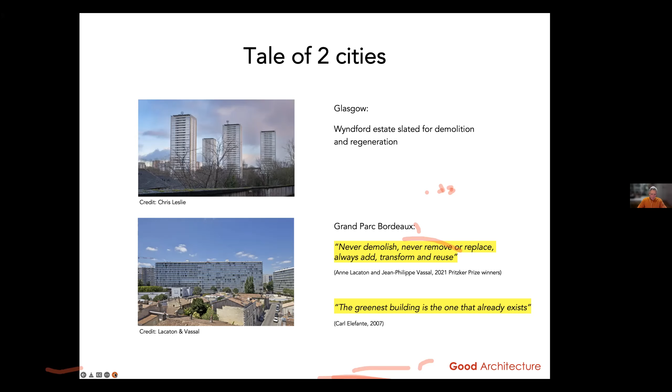It very well summarizes the need to do it because of the climate emergency, because of the need to improve the living conditions in millions of the homes in the UK, and the opportunity it would provide to increase employment, because we are lacking in the construction workforce to do this retrofitting work to our buildings, which in turn has a benefit to the wider economy.

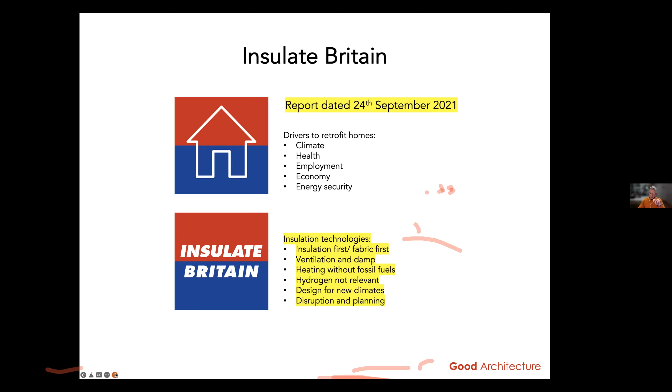Designing for new climates is about, with the changing climate, one of the things we'll be doing when we retrofit our homes is getting ready for a warmer climate and minimizing or reducing the risk of overheating. It also acknowledges that it can be a very messy process, so it does need to be planned.

Then there's the question lots of people ask: how far do you go? I'm a member of the Passivhaus Trust as a Passive House designer as well as an architect. They did a review last year, published just a couple of months ago, about the level to which retrofit should go, relating it to percentage reductions in energy use in buildings, and spelling out what they call a shallow retrofit and a deep retrofit.

These things all come about when we actually look at insulating buildings. It may or may not be at the forefront of our minds when we're doing this, but the more one can do, given the targets we're talking about, and the net zero carbon target by 2050, or 2030 as some would submit is appropriate, or 2025 if you go with Extinction Rebellion and Insulate Britain - these are all things that come about when one looks at insulating buildings.

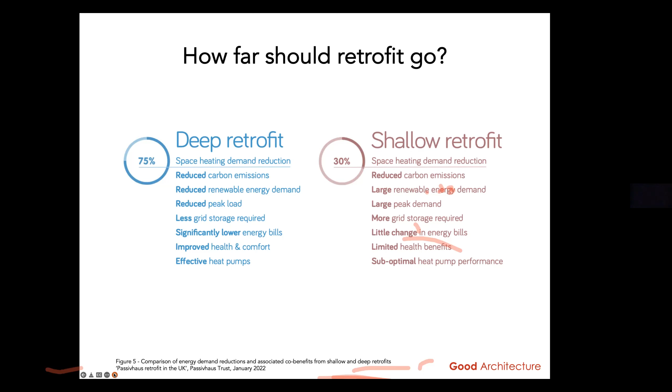The trust also related it to an assessment of how the existing housing stock performs, using the metric called space heating demand. This is measured in kilowatt hours per square meter per annum. It's a way of comparing buildings' performance like for like per square meter - this is the amount of energy used to provide space heating. The biggest bar is in the 130 kilowatt hours per square meter per annum range.

There's a big speculation that typical new build is around 85. And there are then on the left of this chart various standards that people have proposed: passive house new build, and EnerPHit, which is the passive house retrofit standard - you can do that two ways, by space heating demand or by using components performing at a certain standard.

Then there's AECB, an organisation called the Association of Environment Conscious Building, and LETI, the London Energy Transformation Initiative, that have also looked into retrofit guidance. So all in the range for retrofit between 25 and 50 kilowatt hours per square meter per annum - those are the kind of numbers.

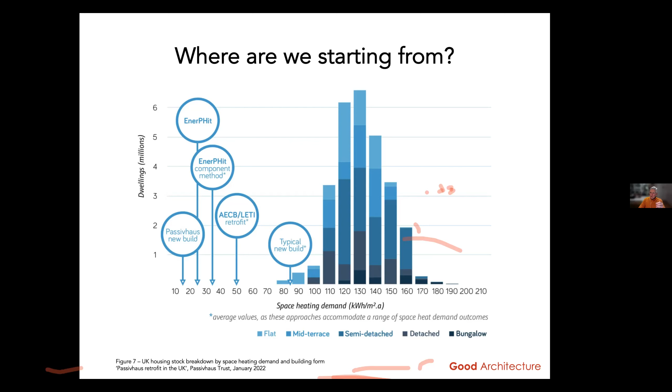Now, I think if at all possible, it's always very useful to gain an understanding of how your existing building is actually performing, in order to know how far you might be able to improve its performance.

Now, I came across this cartoon just the other day on Twitter. Apart from it being by Cluff and Innova Partners, I have no idea who this is or where it came from, so I can't attribute it. But it's about how we often go about missing the main point, which is what I'm talking about tonight. It is about heating.

It's not - batteries won't get us out of our problem. Hydrogen won't get us out of our problem. DAC is direct air capture, which I think is carbon capture, which isn't really going to help us. We can't solar panel our way out of the problem. We can't electric vehicle our way out of the problem. And all the time we've got these problems hanging over us about energy security and the actual climate goals and the changes happening to the climate, and how we want to try and arrest that change in the climate.

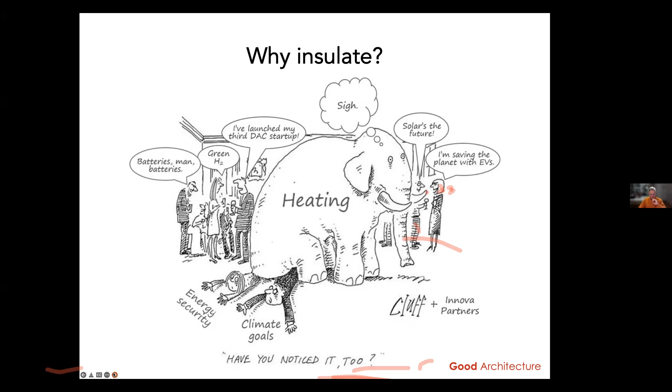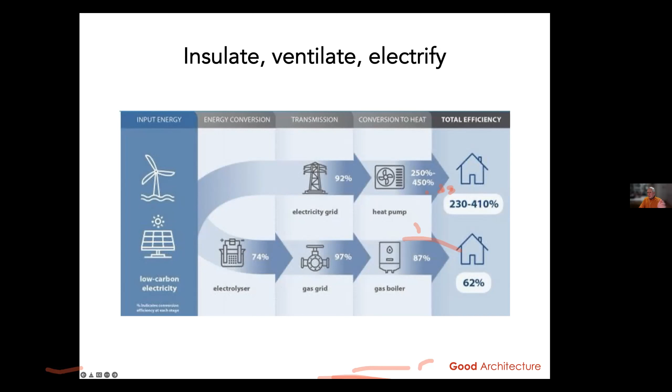That kind of goes with the insulation of properties, and is a logical consequence or follow-on from reducing our energy use through insulation.

Brand names we're unfortunately very familiar with at the moment if we've been following the Grenfell inquiry, Kingspan and Celotex. They are very commonly used in construction at the moment. The mineral wool or rock wool, our typical loft insulation roll mats, we're probably also very familiar with. Expanded polystyrene, extruded polystyrene - again you'll probably be able to get those quite easily through local builders merchants, almost just go and pick them up possibly.

But from there on, the wood fiber boards, cellulose, which can be new plant-based material or recycled newspaper material, sheep wool, and hemp, which is another plant fiber-based product. As we go on down, Diathonite is a very interesting thick plaster coat that one applies as internal wall insulation.

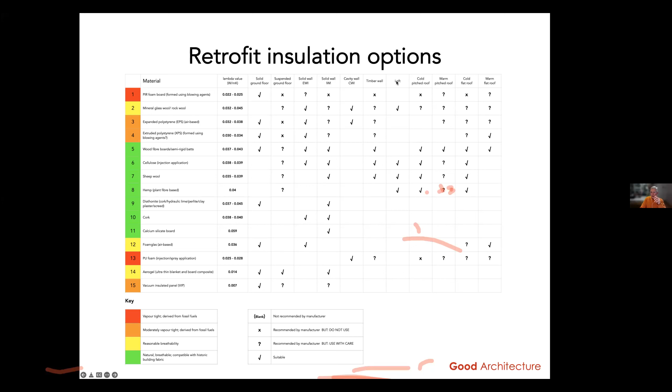Through rising damp, through leaking roofs and gutters and downwater pipes. You can get wind-driven rain coming from the outside and going through the fabric. You've got indoor activities where the moisture generated inside might want to go back out through the fabric. Interstitial condensation is where moisture going in either direction hits a dew point and condenses within the construction. And I think in summertime there's this solar-driven moisture, where there is a moisture gradient from outside to inside, in contrast to the more common winter heating season moisture gradient from inside to outside.

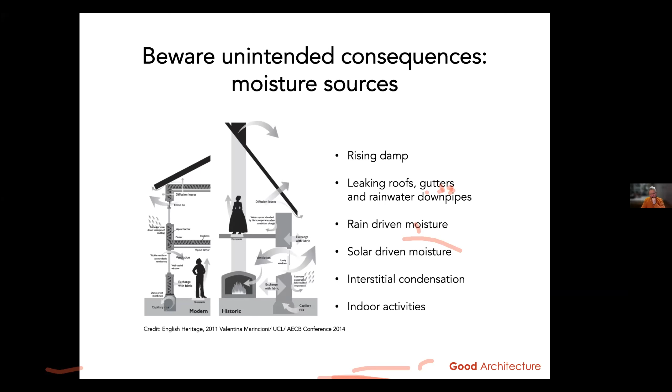I did wonder about putting up this phrase from Dr. Paul Baker, based in Glasgow I think, or the last I heard he was: it's not rocket science, it's harder. That could be a bit off-putting, but to me it's just another way of saying we have to be careful and think things through before we embark on this.

Another architect friend of mine has summarized it like this about how he would approach retrofitting any building. The first one, about getting all asbestos out, is something he's learned from bitter experience himself. And there's this general advice, number 2: carry out repairs before you retrofit. So if you have leaking roofs, cracks in the structure, whatever, you have to sort those out before you begin any sort of thermal upgrade. Otherwise, you could be accelerating the deterioration of the fabric, whereas a well put together, well insulated building will actually protect the structure.

The third point is to do as much as one can to understand how your house is performing before you start. A very simple way is just looking at your energy bills, and if you can, calculate your internal floor area. Convert your electricity into kilowatt hours, and your gas use, if you use gas, also in kilowatt hours. And you can work out this kilowatt hours per square meter per annum figure. It's quite a rough and ready way of working out where you're starting from.

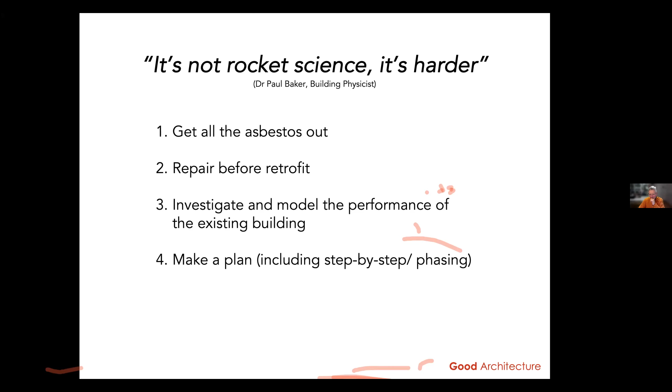And then, as I've been saying already, do make a plan. Sometimes, and quite commonly, it's a realistic way forward, but not everyone can do the whole retrofit to the whole building in one go. So think about how one might do it in a step-by-step process, or phasing things, for different houses and different family or occupant needs - there's no set pattern. But what you don't want to do is something and then have to undo it later to do the next phase. That's one reason you need to be thinking that through in advance.

Just one last slide, at the starting point, these two graphs here. Again, the Passivhaus Trust just wanted to check how the Passive House Planning Package tool, PHPP, which helps designers build Passive House design buildings from scratch, works for their retrofit standard called EnerPHit - that you can't model a typical existing building in it without adjusting it for how we tend to heat our buildings. I imagine most of us possibly have heating on for a spell in the morning and then of an evening, and a lot of people tend not to have it on in the day or overnight.

Whereas the whole premise of the low energy building, the Passive House, is that it's designed to be at a constant 20 degrees internally. But you need to make a sort of adjustment.

The Passivhaus Trust undertook this study, looking at it two ways. Figure 3 on the left looks at how the PHPP prediction, modified for periodic heating, compared to the national average space heating demand. They then checked one specific dwelling in more detail, where the owners gave them their electricity and gas consumption details. They were comfortable with the fit, but it fitted when the average typical internal temperature was around 17 degrees rather than 20 in a new build passive house.

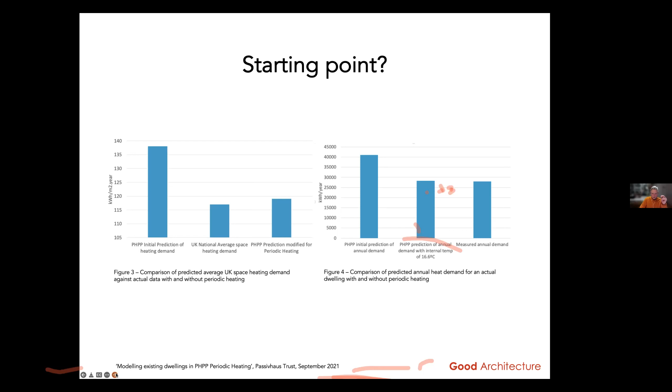There's another friend, Bob Prewett, who was part of the Retrofit for the Future program just over 10 years ago. He has a nice summary diagram that I wanted to use.

This house is a very typical Balham mid-terrace house. At the front, the frontage has been retained and tidied up and repointed, with internal wall insulation. The floor for the first half of the house is a suspended floor that's been insulated, but as is common with these back additions, it has a solid floor at the back, so they needed to look at that separately. At ceiling level under the front pitch roof there's loft insulation, but in the shallower pitched rear roof there's insulation between rafters with a secondary layer inserted. At the back, because it's out of public view, they've used external wall insulation.

This will be a very typical kind of situation we might find ourselves in. There isn't a single wall insulation approach, or necessarily a single floor or roof insulation approach, that needs to be applied to our houses, but several different approaches and materials best suited to each.

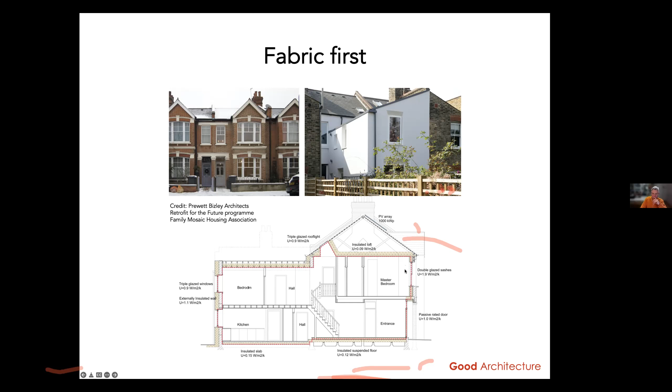So we're going to look first at a suspended timber floor, and the options just for that.

This house is in Scotland. I've been following this guy on Twitter, so that's how I know what he's doing, and he's recording what he's doing himself to the existing suspended timber floor in this house. This elevation on the right shows where he's ultimately aiming for, basically turning it from a 1.5 story dwelling into 2 stories.

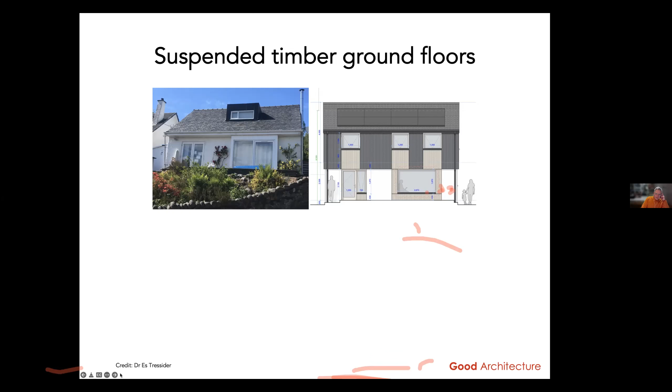I'd say he's a keen outdoor sports person, because that is actually the view from that window. He lives in Fort William, and that is Ben Nevis. He posts photographs every now and again where you just see grey murk, but that's a fantastic view. So I can understand why he's keen to live there and improve this particular property.

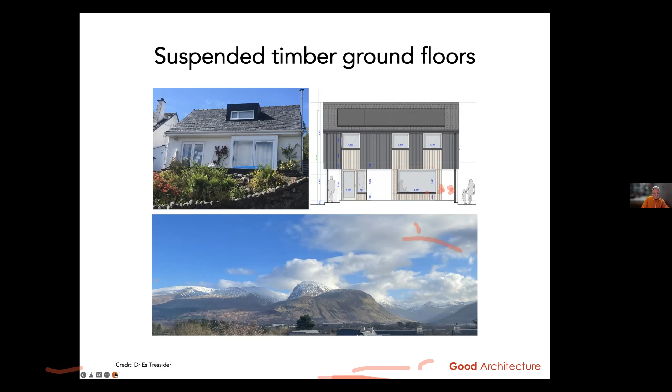Working through these photos, you can see the top left shows the existing timber floor joists, which look in pretty good condition. What he's done quite crudely is add plywood to the sides to create a deeper void, under which he lays this membrane, while still allowing a ventilated airspace underneath to retain insulation and protect it from moving air underneath, which reduces its effectiveness.

These three other photographs at the top show from slightly different angles how the membrane goes in. It is time-consuming, fiddly work, but he's aiming to create 280 millimeters, nearly a foot, of floor insulation. Because it's contained within timber materials, he's using cellulose insulation in its fluffy form that you can just pour in from the bags, and fill the cavity.

A little bit of tamping, but not too much, before laying over this membrane, which is part of his air tightness strategy. It's an air barrier that will ultimately link with whatever he's going to do to his walls and around the rest of the envelope, including the new structure at first floor level.

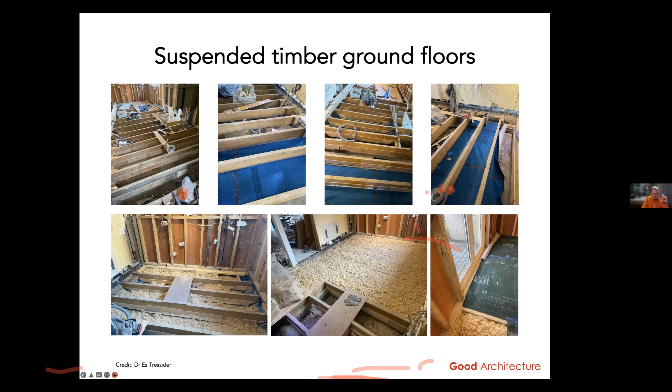But what happens when you're faced with something like this, which is a project of mine a few years ago? The corner of the building here, you can see a brick plinth, so you've got a thicker section of brickwork, and then conventional 9-inch brickwork, a solid brick wall.

When you go inside to look at the floor, this dates from about mid-1800s. It's not put together with such nice regular timbers as we saw with that previous house, and in fact everything is built off earth. There is a lot of moisture coming into this cavity from the earth alone, let alone any other reason, but there were air bricks.

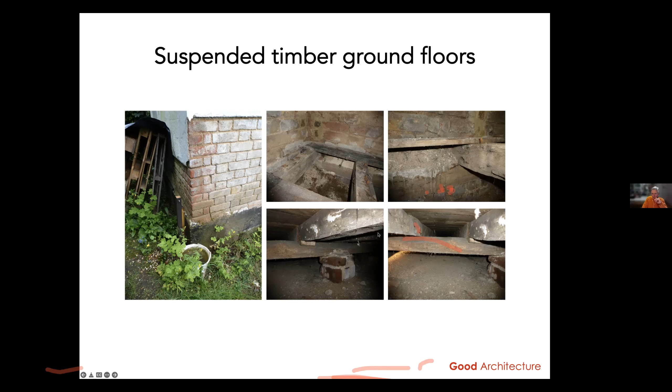We'll come inside there. There's no damp-proof course that one could see, and the plaster could be damp.

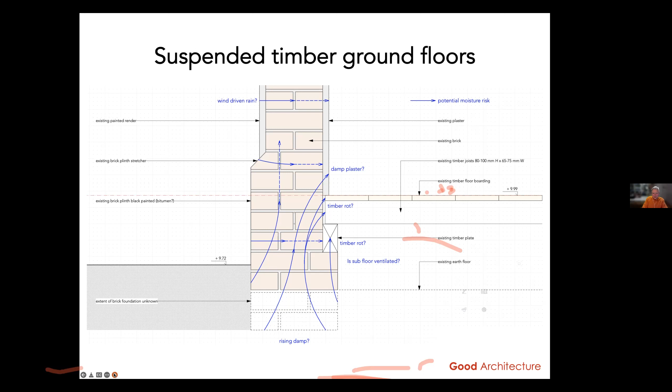So what we decided, with the client's agreement, is what we actually did in this situation: replace the timber floor with a solid floor. In this particular project, the whole house was undergoing a retrofit combined with an extension, so all this disruptive work was able to be done in one go.

So what we've got is 190 millimeters of PIR insulation, equivalent to nearly 400 millimeters of your kind of loft roll type insulation. That's a good level of insulation, a slab with a leveling screed and timber floor finish.

At the same time, in this particular project, this Victorian building, we could not think about external wall insulation, so we were going for internal wall insulation, which I'll show you in more detail in a minute, with the idea that the insulation line is as continuous as possible.

There's a little point there which I'm not particularly happy about, but it's how it worked out. We almost got the continuous layer of insulation so that we minimize the risk of a cold bridge, whereby heat will leak from inside into the outside through a weak point.

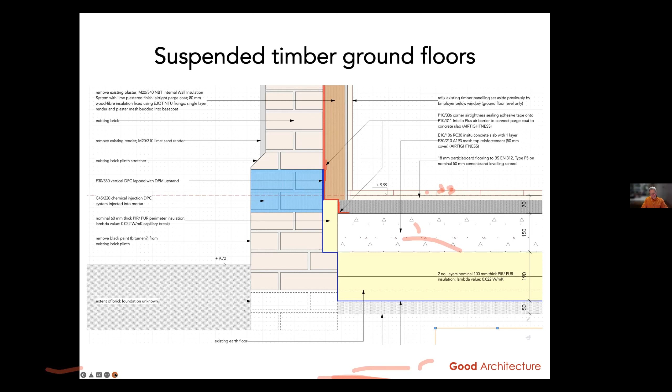These are the existing replacement windows, which are also going to be changed on this project. And here, because it's a semi-detached property, we are looking at insulating the party wall, and making that also airtight as we go.

Then the process of putting it back together after having stripped the plaster off and removed the ceiling: this is the lime leveling coat having gone on here, still at this point with the original replacement windows. The ceiling is removed in order to put in an air barrier on the ceiling and battens on the underside, where cables will run for lighting and so on.

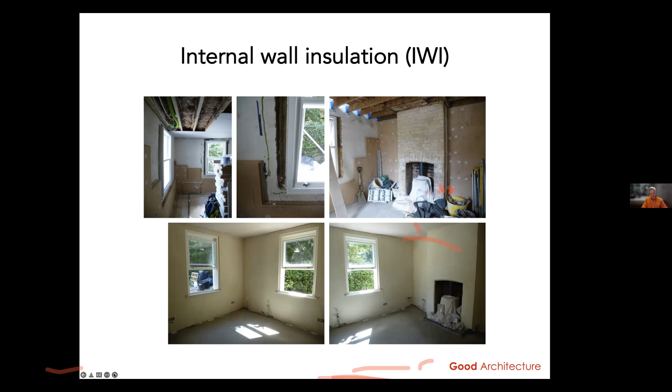And of course, if we remember the diagram about the way moisture comes, the risk of moisture coming into the building through a wall from outside. On the left here, this is what we were starting with, the existing render on the corner of the building, and on removing it, this was a cement render that came off quite cleanly. It was not in good condition.

We wanted to check the existing construction behind, and we did find a few little things that needed tidying up and repairing, like the lintel on that window, and this crack at a weak point in the brickwork, before putting a new lime render back on to complete the retrofit or renovation of that external wall.

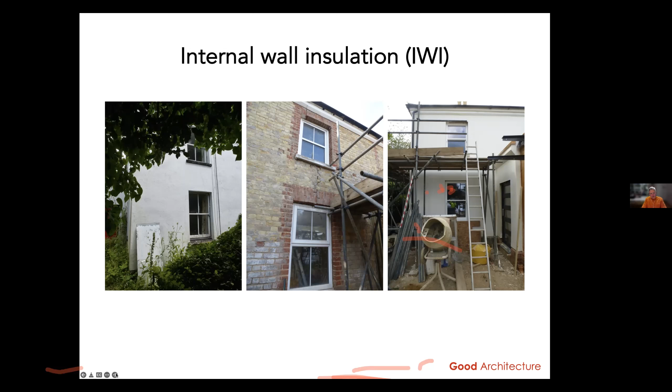This is my last but one slide, just on the question of loft insulation. The amount of loft insulation - if one can get 300 to 400 millimeters, you are putting a good level of insulation into your property. But of course, most ceiling joists are maybe 100 millimeters deep, so what ways can you build up your layers of insulation?

In this example there's a proprietary product to sit these legs on top of your existing truss rafter - one of those triangular legs standing up - with a rail that clips across the top, onto which you can put a chipboard deck. So you've still got your loft storage, but you're not squashing your insulation.

The photograph on the top left isn't perfect, but it's not bad - I've seen a lot worse in terms of how loft insulation is installed. The picture on the right I'm not sure is even real; I think it's a computer-generated image showing the perfect way to lay insulation the same depth as your ceiling joists, then cross-lay subsequent layers. It's tricky to build up without squashing it, but with a loft support system like on the left, you give yourself the best chance of getting a good depth of unconsolidated insulation.